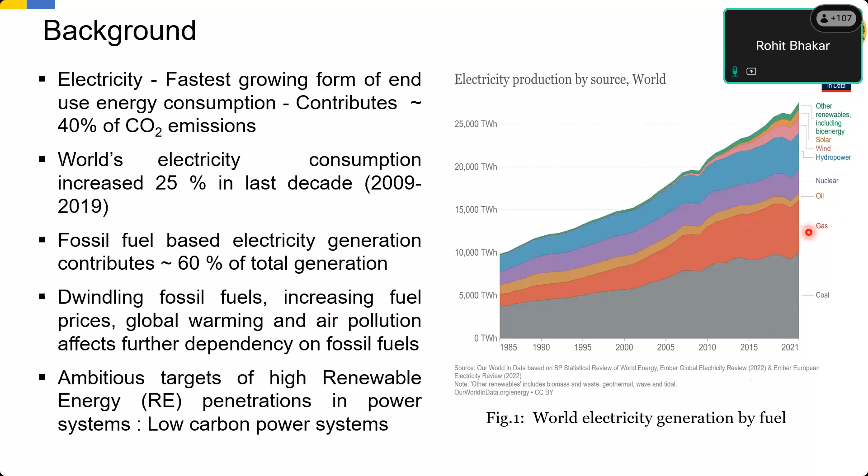So you can still see that the portion of electricity being produced by renewables is significantly low, and a majority of it is still coming from conventional power plants like coal, gas, oil, and nuclear. However, as we are moving towards renewable generation, the two technologies which have dominated the area of renewable generation are wind and solar. Wind is slightly costlier. Solar is becoming cheaper when we are situated in tropical areas close to the equator.

Wind is significantly available on seashores, on and off the shores, and that is one of the areas where significant generation is happening. That is happening on European shores, where a large number of wind turbines are placed not only on the shore but also off the shore. On both sides the wind turbines are there.

In India, relatively, wind generation is not growing as fast. Solar generation is picking up at a much faster pace because of cost economics. The cost is somewhere around 2 to 2.5 rupees per unit, which makes it much cheaper as compared to wind generation, which comes somewhere around 3.5 to 4.05 rupees per unit.

Over the past few years, the penetration of renewables has been increasing, as high as 67% or even more in Denmark, 50% in Germany, 40% in Spain, approximately 20% in the US. In India also, it has increased by a similar number, somewhere around 25% or so.

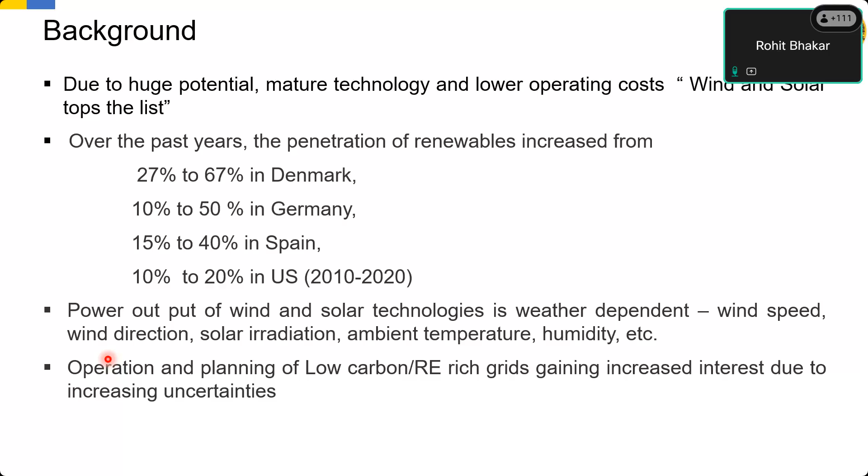And the problem is, in the case of conventional power plants, they could do that because whenever the demand would change, they would inject that quantum of fuel into the grid. If the demand goes down, they'll inject less fuel. If the demand goes up, they'll inject more fuel, thereby ensuring that both the generation and demand are equal.

So how things are evolving, what are the changes that are happening when we see the scenario change from conventional to RE rich grids? Conventional grids, as we just discussed, are primarily fossil fuel based grids. Their generation is controllable simply because we control the quantum of fuel being injected. The only uncertain part in the conventional grids is the load. So as the load varies, we try to match the generation by injecting that quantum of fuel into the grid.

The generation is reliable because we can control the generation at every point of time, though this creates significant carbon emissions, and there are high operation and maintenance costs associated with conventional grids as well. When we go to RE rich grids, where there is a significant share of RE resources, it is significantly dependent upon nature, which leads to a limited control over the grid.

The challenge is, not only is the load uncertain, but the generation also becomes uncertain, thereby putting a pressure on the system operator to manage two uncertain quantities, one which is load and second which is generation itself. So trying to handle a system in which both the demand and supply are uncertain becomes a Herculean task for the system operator.

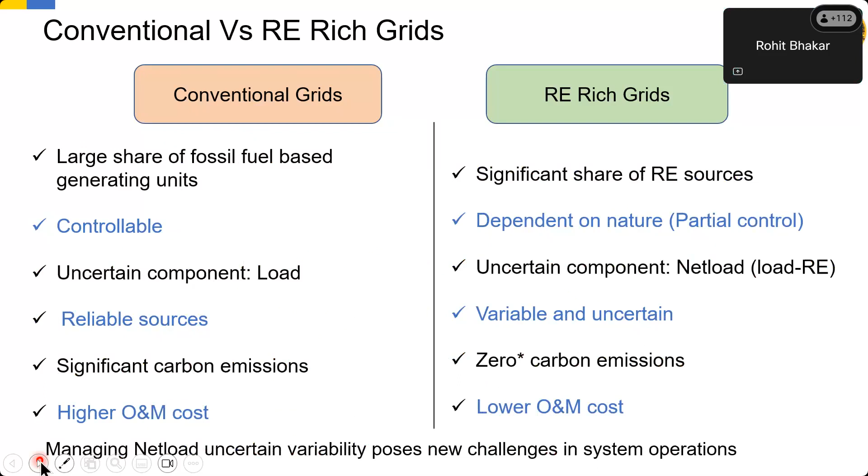If none, then we'll go ahead.

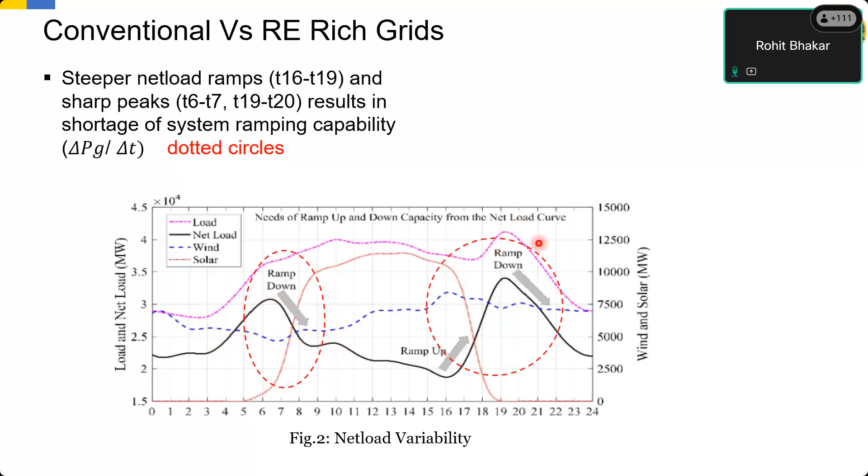That opens up a new set of challenges on how the system has to be operated. You would have heard about the duck curve, which reflects the generation. May I ask, can this be correlated or by any way related to load shedding also? Load shedding would obviously happen when there is not sufficient generation or ramping ability is not there. Both ways, load shedding would happen, obviously.

And if you do not have those capacities, you will have to resort to load shedding. It's something like you are driving a vehicle that is overloaded. It will have limited capacity, it will ramp up very slowly, a heavily loaded vehicle sort of thing. And that would eventually lead to a situation that either you offload some of the load if you want to speed up, or the ramping up would happen at a very slow pace.

Similar examples from any other such systems we can always quote. Obviously, in the case of power system, it would lead to challenges of frequency, load shedding, all those things would come up. Coming back, the net load shapes in the scenario of high solar, the duck curves that we see, which is a very common term when we see how the demand would vary. So the duck curve would become more prominent.

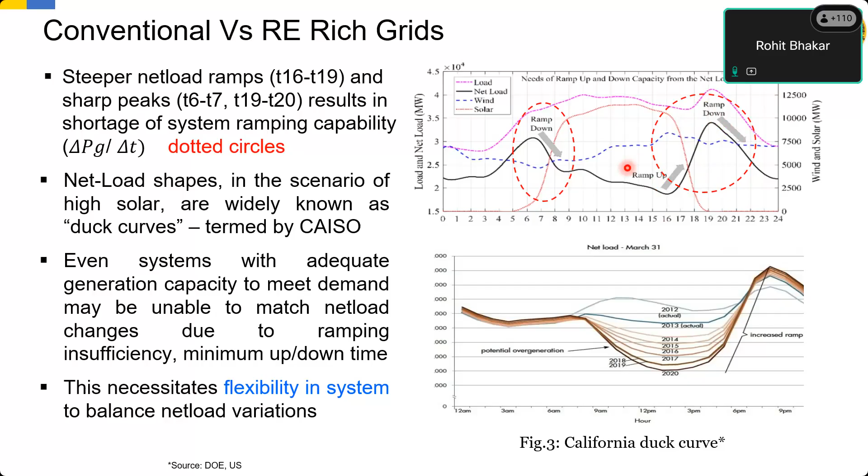Why is this big problem becoming aggravated across the world? Whatever part of the world you talk of, Europe, you see cases like Germany, with significant deployment of distributed solar and wind, a large number of households having PV rooftops, and they are facing ramps as high as 10 gigawatt per hour and ramping down of 7 gigawatt per hour. So that is a very large ramping up and ramping down rate required from the power plants.

Similar challenges in Colorado in the US, where wind power supplied more than 61% of the energy to meet customer demand. Denmark, where because of high wind conditions, the wind power plants are producing as high as 140% of the demand. If the demand is 100 gigawatt, they are producing 140 gigawatt of wind generation. So these types of situations do arise when we are shifting towards higher and higher RE penetration.

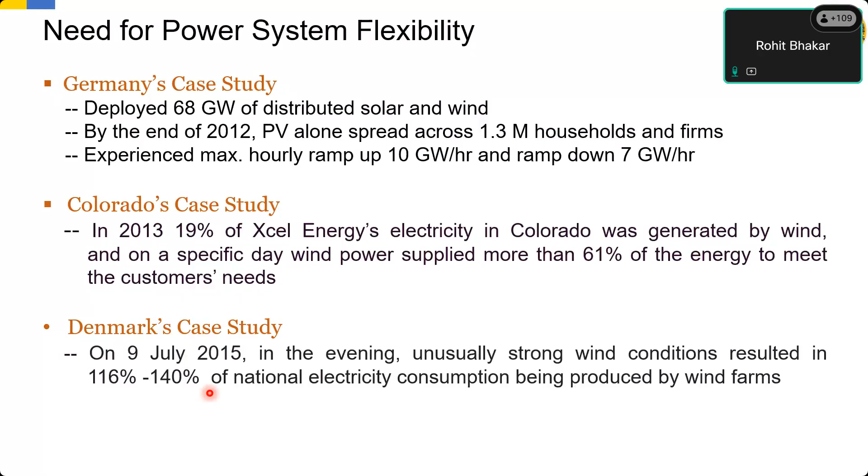And this is not something that is easy to handle, because the key constraint of balancing demand and generation at all points of time has to be followed by the system operator. This leads us to the challenge of understanding, modeling, and focusing on the problem of power system flexibility, which we define as the extent to which a power system can modify electricity production or consumption in response to variability. It may be expected variability or it may be unexpected variability.

So whatever variabilities exist in the system, the question is how much capacity the power system has in terms of its ability to modify production or consumption. This is the broader challenge. It is usually classified into two facets. One is the operational framework, which we call short-term operational flexibility. Another is a planning framework problem, which we call the long-term flexibility requirement planning problem. Both have different facets to understand.

Those of you who come from an electrical engineering or power system perspective understand that short-term flexibility talks about optimal scheduling, optimal power flow, unit commitment. These are the types of things that we talk about in short-term operation. Whereas in the case of long-term planning, we start looking into the generation portfolio, what is the generation mix, and so on and so forth.

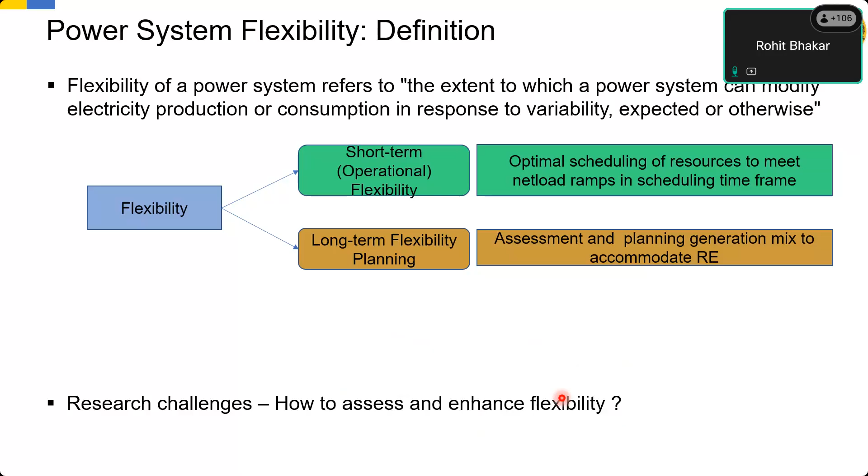First, we need to quantify which system has got how much flexibility. Second, how do we develop mechanisms so that whatever flexibility is required, we can enhance that flexibility. This is slightly mathematical, involving probabilistic distributions, but it is not so difficult to understand.

To measure the power system flexibility, there are certain indices which we have focused upon, which have been developed. We'll understand them as I go through. One is the ramping limit.

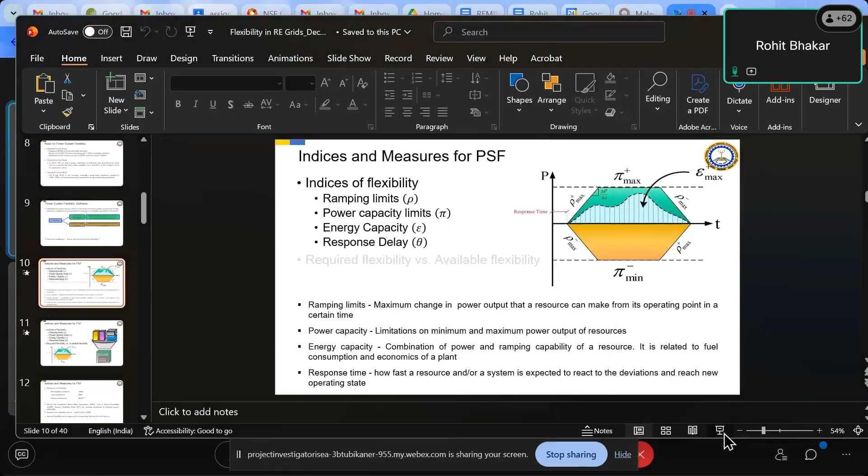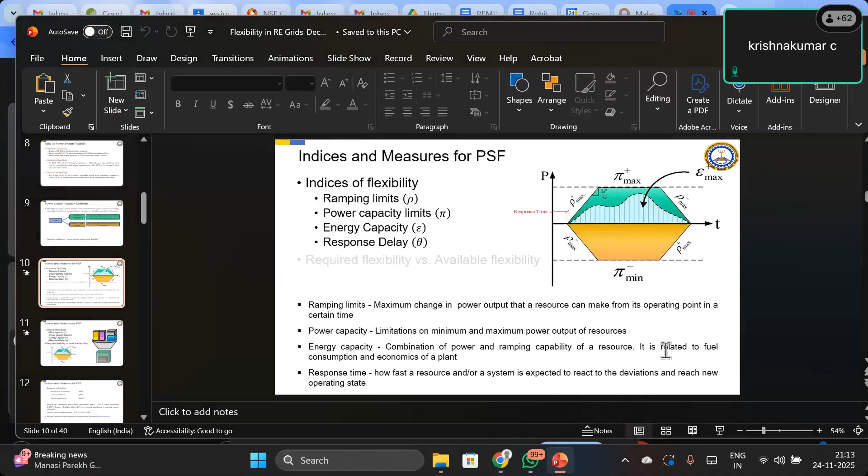Yeah, sorry, I had an urgent call to take. Thanks for your patience, I'm back. Yes sir, no problem. I hope you can see the slides, Dr. Ganesh - yes sir, it is visible clearly. Any of the participants? Yeah it's clear. Thank you, thank you, thank you.

So we were trying to understand what are the indices of flexibility. This is some mathematical modeling to understand what are the ramping limits, what are the capacity limits, what is the overall energy capacity, and what is the response delay in responding to situations. These are the facets which decide whether the system has got flexibility or not. Different parameters indicate different types of flexibilities into the system - whether it can ramp up or ramp down fast, whether it has got the capacity, whether it has got the energy to deliver the required energy demand, and what would be the response time expected to react to the deviations and meet those deviations in the system. This is a general understanding that has to be made.

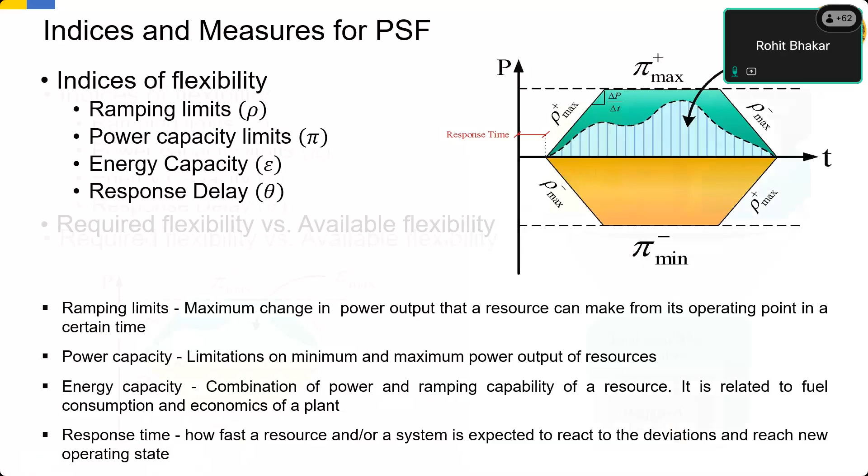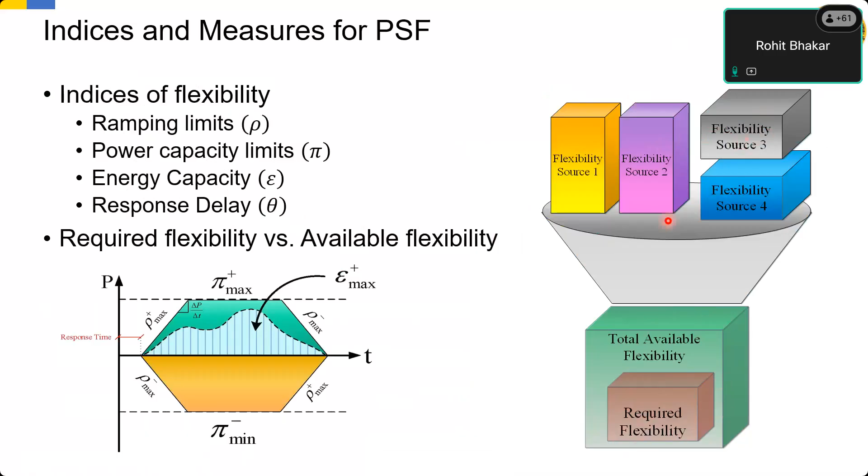Now, all this flexibility has to be provided in the grid by different sources. So we need to identify what would be the sources from where the flexibility can be sourced. Obviously, whatever is the total available flexibility, we only require a small part of that flexibility, and it can be sourced from various sources. What are those sources and how do we do it?

And in case there is a lack of flexibility, how do we quantify it? Typically we have got three variables, three parameters to measure that. One is that if you have got a lack of flexibility, you would face renewable curtailment, quantified in terms of megawatt hour, load curtailment in terms of megawatt hour, or ramp insufficiency in terms of megawatt per unit change in time. These type of metrics also people have started focusing upon.

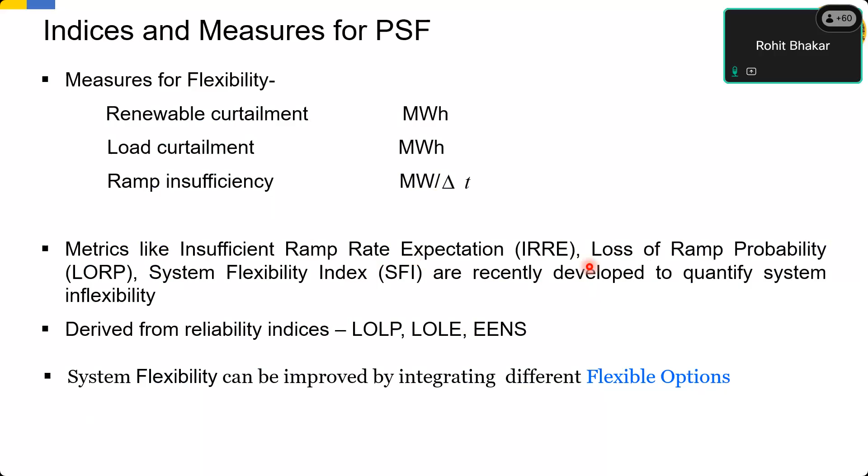The ways by which we meet flexibility - why do we need to focus? Because when we are putting in more and more renewables, we need to develop systems by which flexibility can be ensured into the grid. What are those mechanisms to bring in flexibility? I hope you can see this slide. Any participant, if you can just respond - yeah, it's clearly visible. Okay, thank you.

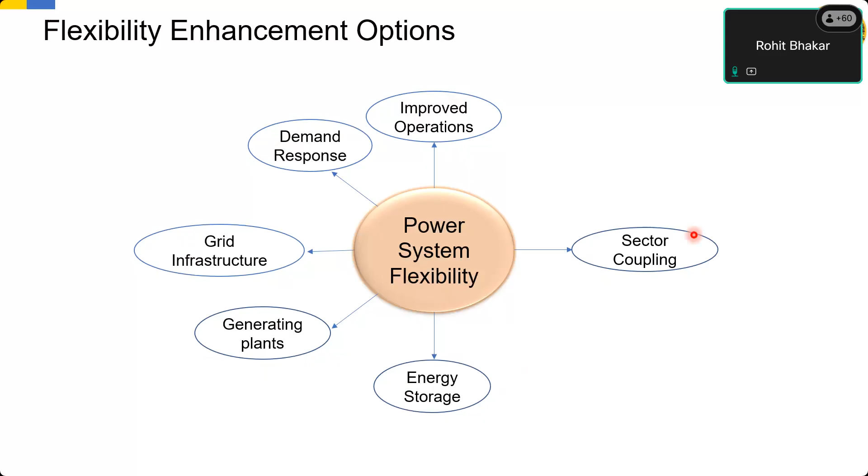So this is a paradigm which reflects the resources by which we can enhance the flexibility. This is a very wide picture of the options that are available. This is important when we are going in for more and more renewable penetration. These are the areas we need to focus upon, and one or more of the solutions we need to adopt to fulfill the requirements of flexibility in the grid. This could be by improving operations, providing demand response, improving grid infrastructure, putting in more generating plants, putting in storage, and going in for sector coupling. We'll touch one by one on one or more of these points.

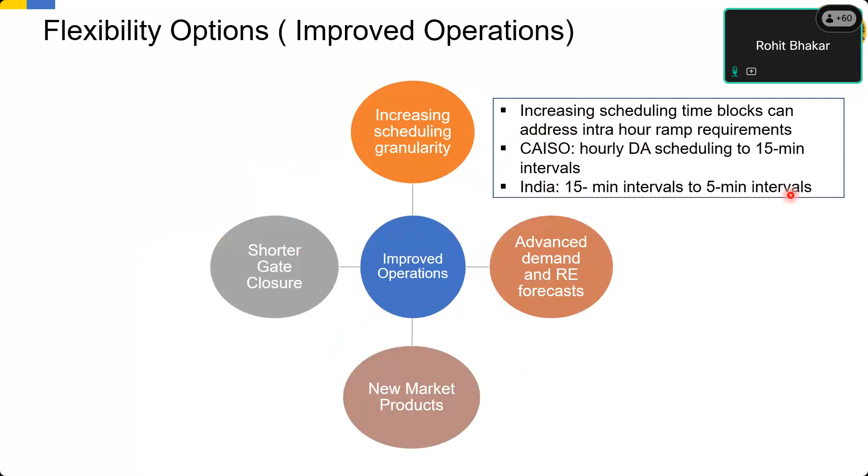When we talk about improved operation, we talk about increasing the scheduling granularity - rather than scheduling the system for a 15-minute interval, we start focusing on every 5-minute interval. This helps us address the demand supply balance in smaller time frames, requiring the system operator to focus at every 5-minute time scale to ensure demand and supply are balanced. Forecasting has to be improved, in day ahead and real time generation, so that understanding the forecast one can make quicker decisions. New market products have to be brought in, allowing payments for those generators which can handle uncertainties, scheduling requirements, and flexibility requirements in the system. That is one way of handling it.

Shorter gate closure, that is when the markets have to be closed prior to delivery. More and more market products are made available so that more generation, more sufficiency of generation, is available in the system through different market products.

This is something we talk about in electricity markets as far as demand response is concerned. Demand response is a much talked about topic, and it is the ability for demand to respond to certain economic signals, tariffs, or pricing. It is a very cheap option which enables demand to be shifted or switched on or off according to price signals. It is highly reliable and quite manageable. This is one of the ways to provide flexibility to the grid.

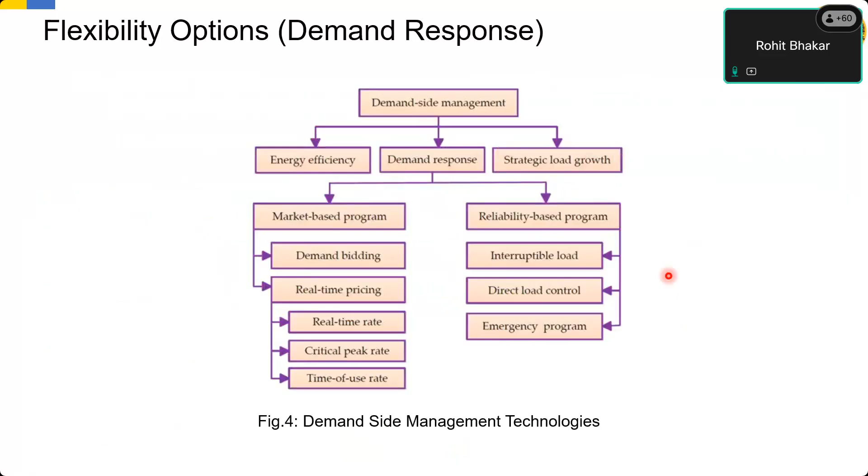You would have heard about demand side management mechanisms like increasing efficiency, providing demand response, and strategic load growth. We can have market-based programs, reliability-based programs, and a variety of demand side management technologies that exist.

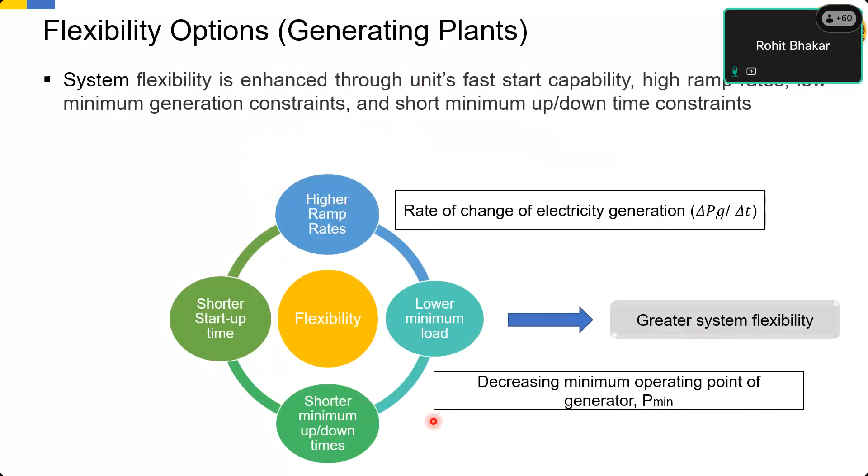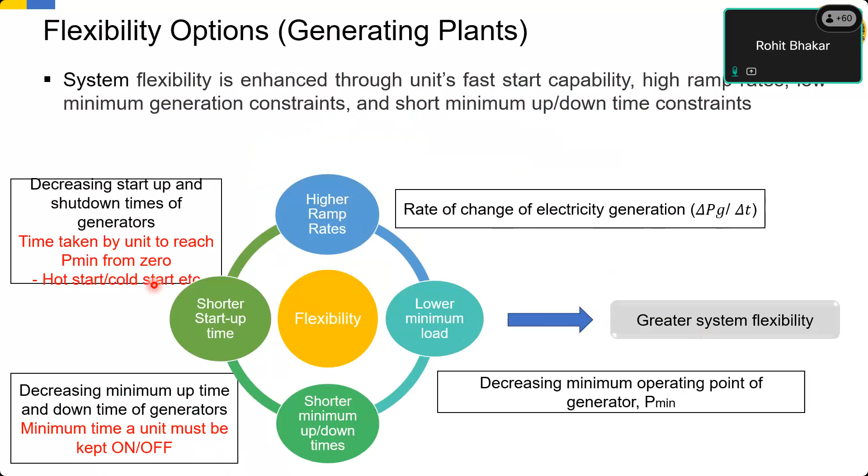As far as generation is concerned, we can focus on lower minimum load to provide system flexibility, higher ramping rates from generators for more flexibility, and decreasing the minimum operating point of a generator, that is the lower minimum load. Decreasing the minimum uptime or downtime of generators also increases flexibility, along with shorter startup times of 4, 8, or 24 hours, which we could reduce by improving power plant technology. These are some of the flexibility options on the generator side.

Systems with large hydro and gas are more flexible, so they can provide more flexibility and ramping capabilities, whereas dependency on thermal and nuclear is restrictive in terms of providing flexibility.

Flexibility indices help us understand what the requirements are. These indices depend upon typical parameters: what is the minimum up-down time, ramp up ramp down time, operating range, and startup and shutdown time.

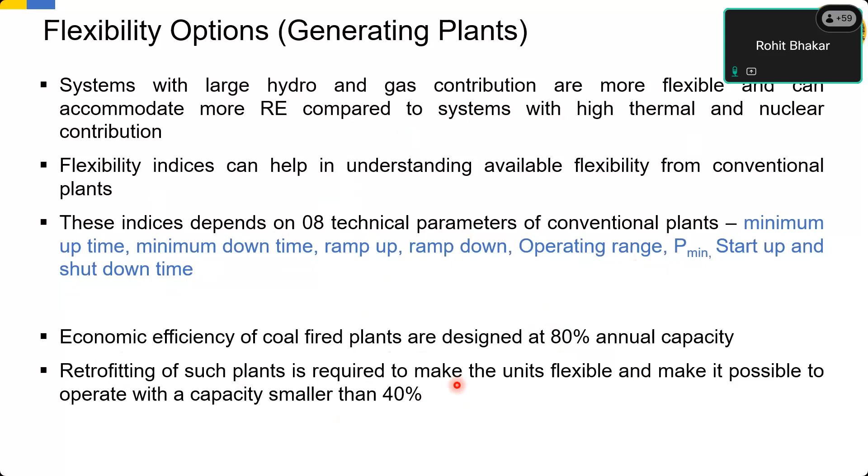Usually the economic efficiency of coal power plants is designed to provide maximum efficiency when operating at 80% annual capacity. So if it's a 100 megawatt coal power plant, maximum efficiency is when it's operating at 80%. We need to retrofit those power plants so they provide a similar level of efficiency even when operating at lower capacities, so that system efficiency, the generation efficiency, is maintained.

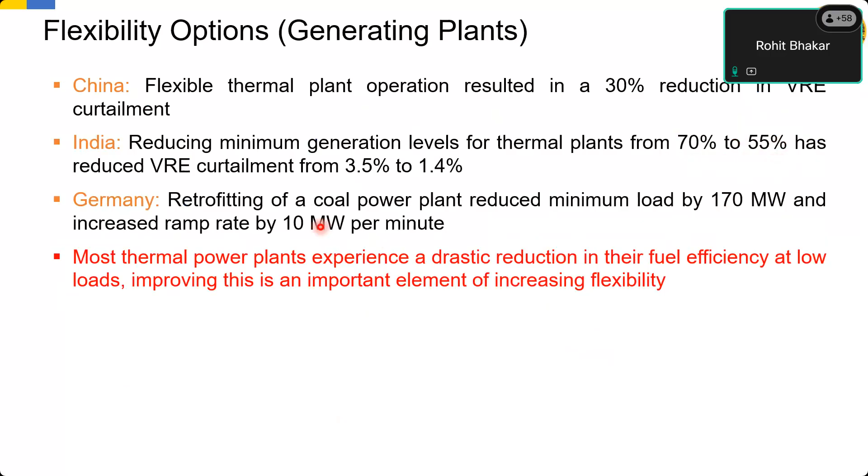Different countries are already working on providing flexibility options from generating power plants, like China and India. India is typically focusing on reducing the technical minimum of those power plants from 70% to 55%. That means you allow thermal power plants to operate at 55% as and when required, otherwise they usually become inefficient when operating at lower capacities. Similar retrofitting is being done in several countries across the world.

Another flexibility option people have started focusing on is energy storage. You would have heard about it. Even last week, when they talked about putting up a solar park in Pugal, Bikaner, there is a lot of battery storage coming up in association with that, and that provides flexibility in terms of fast ramping capability. Though it is capital intensive, investment in this segment is increasing and likely to increase over time.

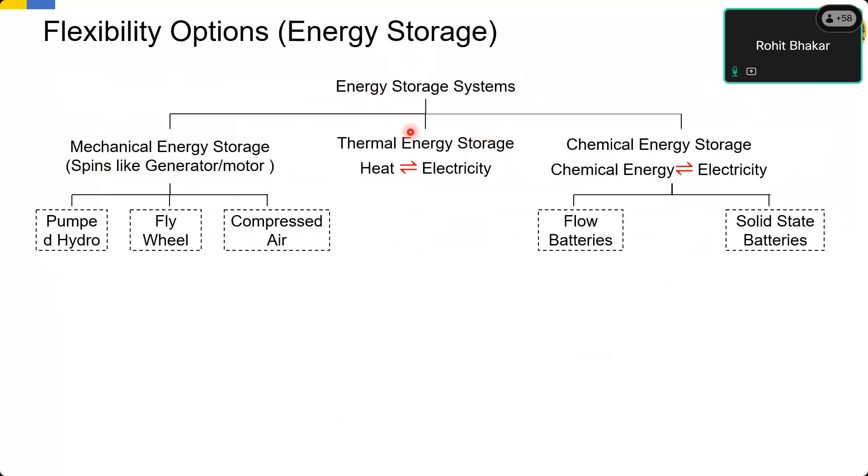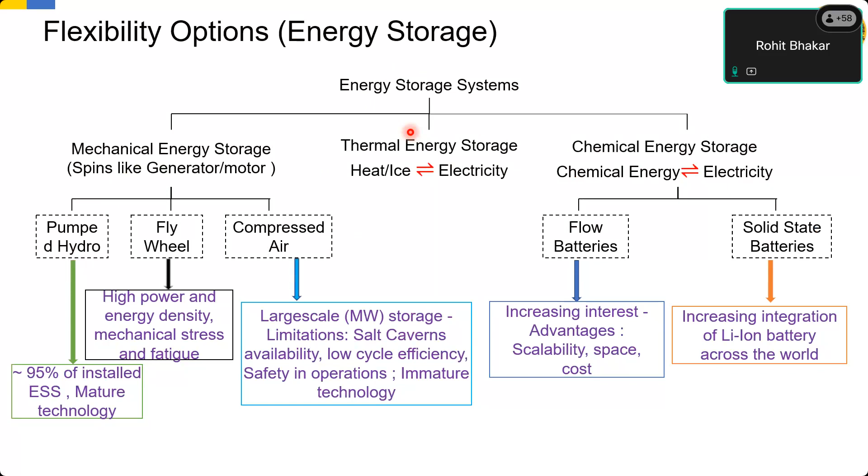Apart from battery storage, there could be other storage options too. Pumped storage is being talked about, as well as compressed air, flow batteries, solid state batteries, and thermal energy storage. These are technical solutions people can adopt to have storage capacities in the system to provide flexibility into the grid. All sorts of storage technologies have different characteristics in terms of densities, efficiencies, and cost economy. Some have become economically viable, like battery storage, and pumped storage is also picking up.

There are wider applications for battery storage. It not only provides ramping capabilities, but a variety of services: it can provide bulk energy supply, ancillary services like load following, voltage support, black start, frequency regulation, and spinning reserve. It can provide quality and reliability of power, help firm renewable capacities, and help shift RE generation availability. Depending upon the type of requirement in the grid, the utility of energy storage can vary, and that is where the value from battery storage can be secured.

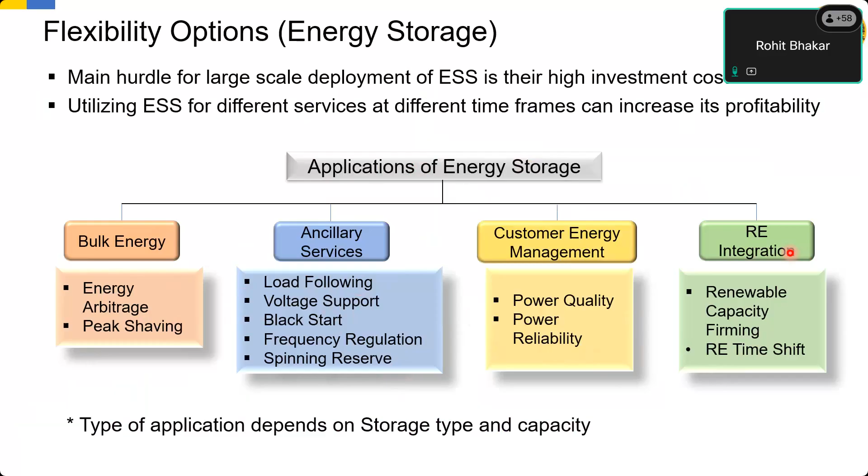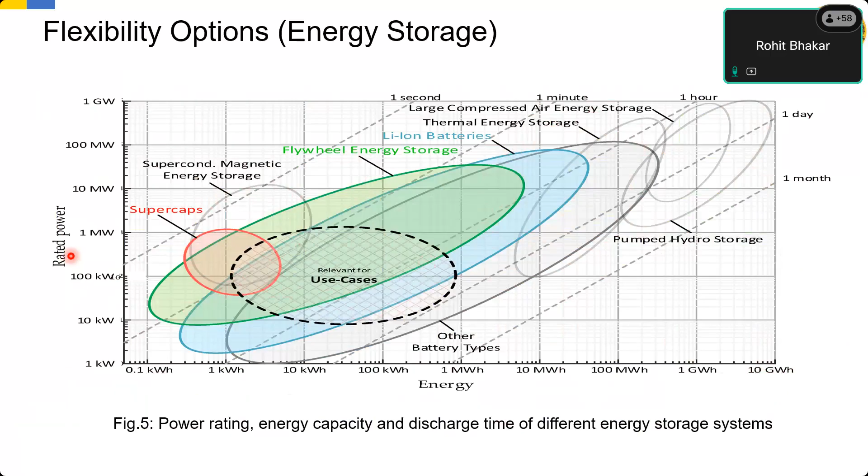Sector coupling is another interesting area to focus upon, which allows different energy sectors like electricity to be coupled with other energy sectors like heat, gas, oil, interconnecting those, or connecting energy consumption sectors like building, industry, and transportation. This brings in value in terms of the ability to shift the generation as well as the load and the storage as well. So these types of facets are also being talked about when we try to see the overall energy perspective.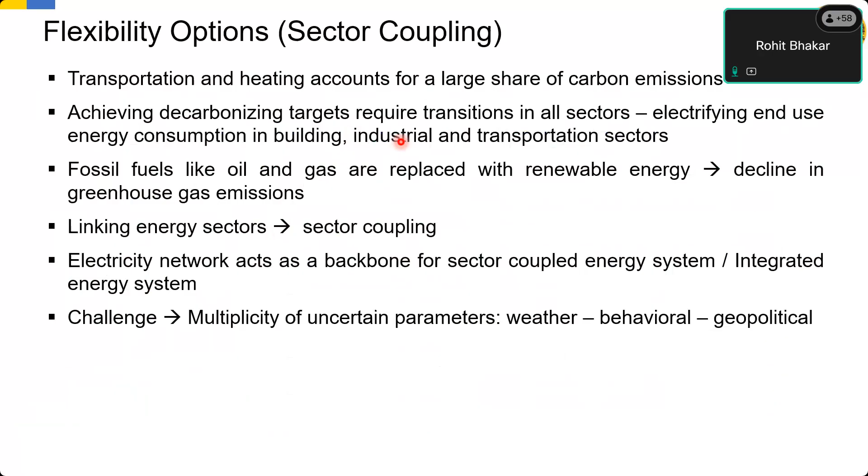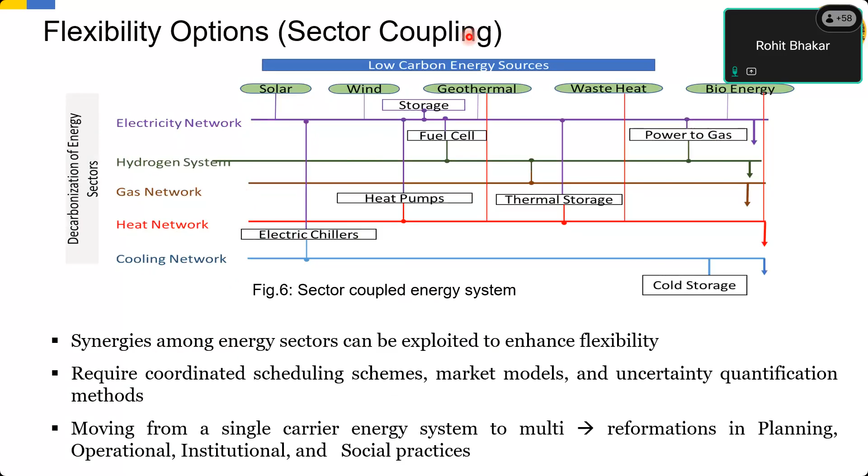In terms of sector coupling, we talk about integrating the electricity network with the hydrogen network, the gas network, the heat network, and the cooling network. Different sector coupling mechanisms can be adopted because each network has got different ramping capability and different storage capacities. So the benefit of one or more of those vectors can be utilized to mitigate the requirements in other energy vectors. This is the beauty of sector coupling. Over the last 4 or 5 years, people have started focusing upon both the operational perspective as well as the planning perspective of coupling different energy sectors.

These provide a variety of flexibility options, from short-term flexibility challenges to mitigating long-term flexibility requirements. When we talk about short-term flexibility options, some of those points we pointed out, frequency, inertia, primary frequency responses, come under the domain of short-term operation challenges. These also can be taken care of by the flexibility options. Balancing in terms of minutes, load following in terms of minutes and hours, can also be taken care of by different options. Moving on to hours and days, the problem comes down to unit commitment and resource scheduling. Sector coupling helps in these cases, and other storage options can help.

When we go over to a longer time frame like months and years, different mechanisms like hydrothermal scheduling, resource planning, and transmission expansion planning help to provide sufficient flexibility into the grid so that the flexibility challenges and ramping challenges can be mitigated. So the type of research that people need to focus upon is of wide variety. You may be working on a short-term time frame in terms of inertia and frequency, on a long-term time frame of planning perspectives, or intermediate time frames of operational planning as well.

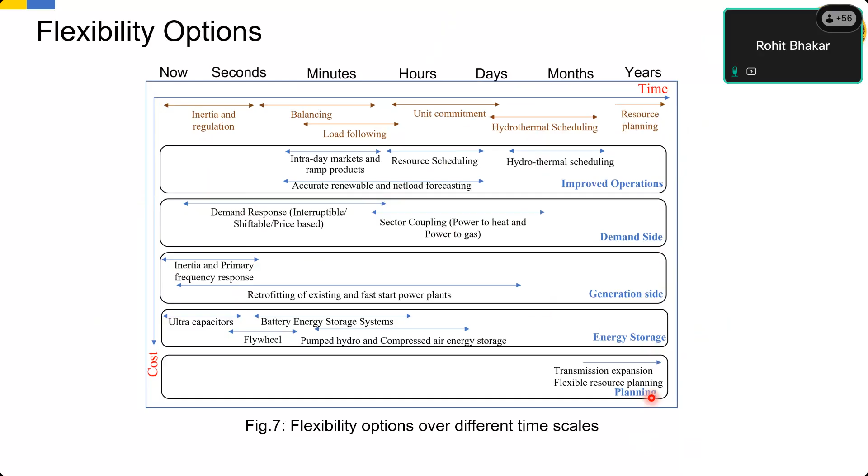So depending upon the time frame you are working in, the economics involved, the market products involved, the technologies available, and the operational strategies you can adopt, improved operation, demand side, generation, storage, or planning, all these things have to be focused upon from a broader perspective when addressing the challenges arising from high renewable penetration. We need to focus upon improved market design, increasing the granularity, improved ancillary services, capacity markets, improving system operation, better coordination between transmission and distribution system operators, better forecasting mechanisms, and new business models like aggregation and peer-to-peer.

Enabling technologies could be developing mini and microgrids, virtual power plants, blockchain technologies. All these come under the spectrum of technologies which can be adopted to provide those services in a more flexible way. Broadly speaking, the key takeaway is to focus upon one or more of these mechanisms in terms of improved operation and demand response. As you see, improved operation is a cheaper, cost-economic mechanism. Demand response is also a cost-economic mechanism to provide flexibility. As you go down the line, these are costlier options to exercise for providing sufficient flexibility into the grid. If you do not do it, the cost of providing poor power supply, or the alternate cost of providing those services, would be significantly high.

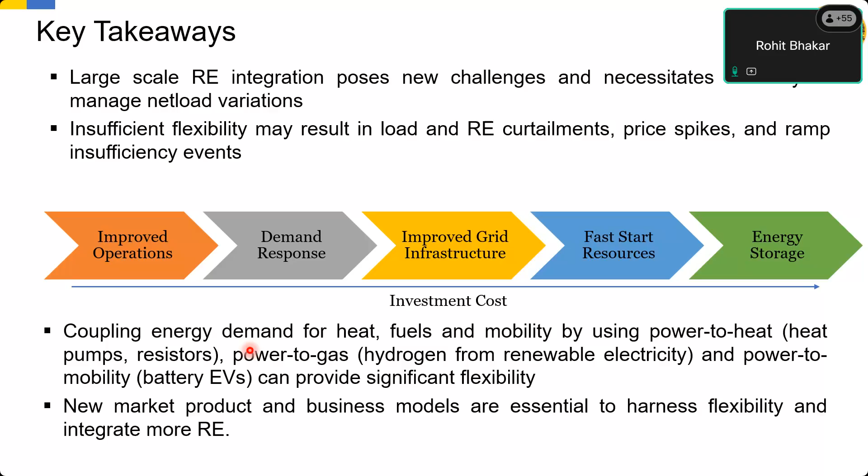So all these facets people have been talking about, and the facets are not only limited to electrical energy. There are challenges related to mechanical, because when we talk about energy, people from all perspectives, whether they are coming from mechanical, chemical or other spectrum, need to be understood. Their perspective needs to be understood. Even people coming from a civil engineering background, when we are doing building design, their energy requirements have to be understood. So all these types of studies help you to understand a variety of assets wherever energy is required.

Broadly speaking, we need to focus upon the operational perspectives. We need to think about institutional perspectives in terms of new market products and scheduling frameworks. And we need to think about long-term planning in terms of which generation sources we need to focus upon, what are the operational parameters, and when each type of generation technology should be brought in, so that whatever RE penetration is happening, we are still able to handle the grid in an efficient and robust way.